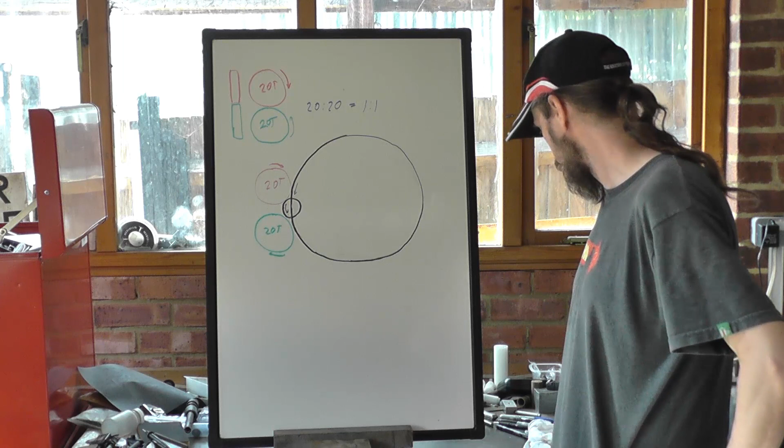At the top here I've drawn a couple of circles to represent gears, a driver gear and a driven gear, and I've drawn them at the side to show simple or simplex gearing, and I've got arrows showing the direction of rotation. Anybody's going to be able to see a 20 tooth gear driving a 20 tooth gear, ratio is 20 to 20, equivalent to 1 to 1.

Below it I've drawn again a driver gear and a driven gear, and I've drawn a couple of different idler gears of widely varying sizes. Now, one way of thinking about gearing is this is a 20 tooth gear. If it makes one revolution, it has moved by 20 teeth. So in the case of this small gear, let's just say it's a 10 tooth gear.

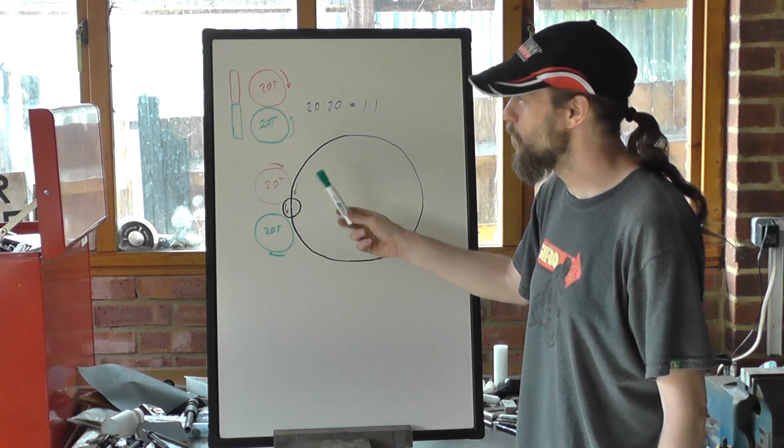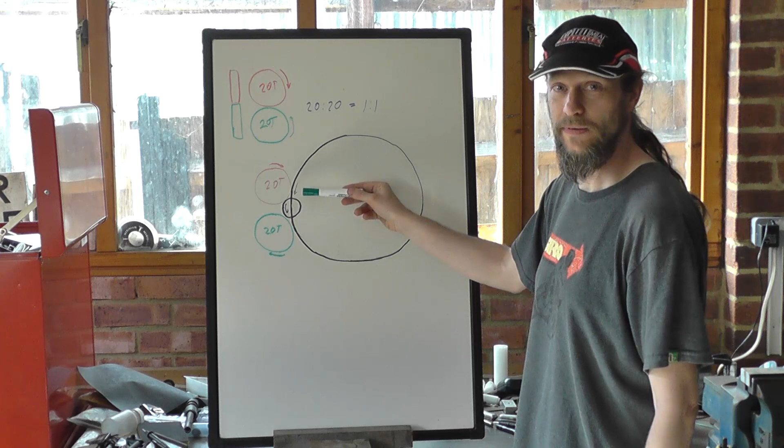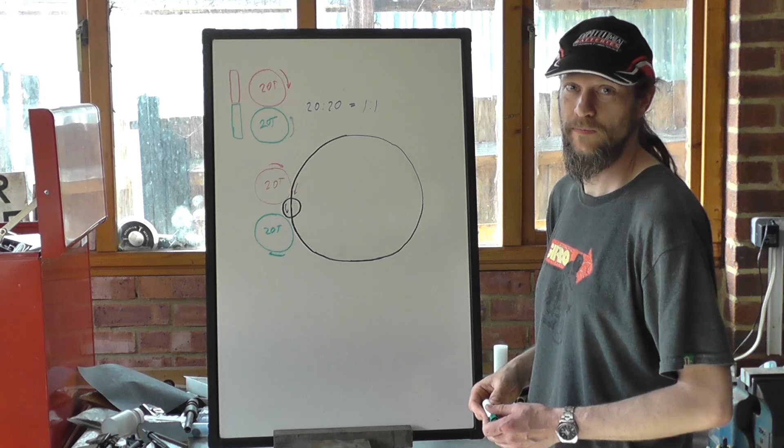If it's moved 20 teeth, it's moved 2 revolutions. When it drives the output gear, it's moved 20 teeth, so it moves this gear 20 teeth, that's moved 1 rotation. That moved 1 rotation, the gearing is still 1 to 1. This gear, it's moved by 20 teeth for 1 revolution of this gear, so this gear moves 20 teeth, 1 revolution, 1 to 1 gearing. The idler has no effect whatsoever on the ratio between these two gears. What it has done is changed the direction of rotation.

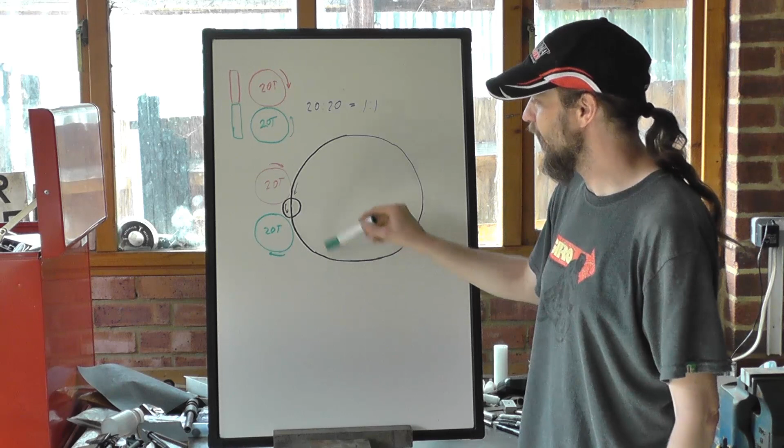Obviously, if there were another idler gear driving as well, we'd be back to this relationship of rotations. But again, the second idler gear wouldn't have affected the gearing. Okay, excuse my poor sketching skills.

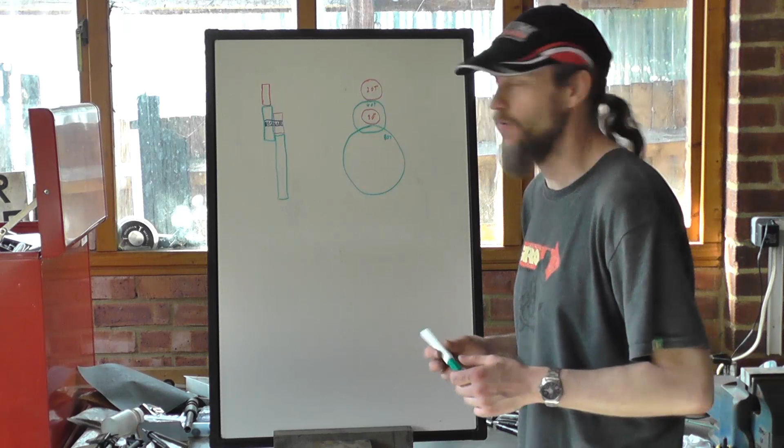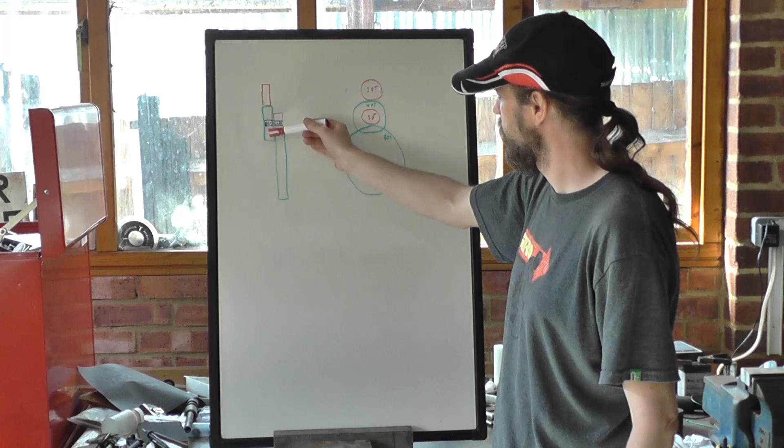But now we have compounded gearing. This is our initial driving gear, which is driving this gear. And that's on a common shaft with another driving gear driving another driven gear. So now we've got two ratios to deal with. So I've just written some fairly arbitrary numbers in there.

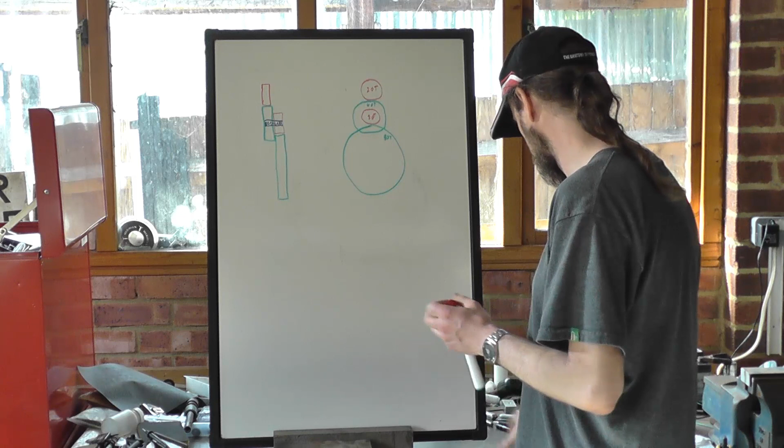So to start off with, we've got 20 to 40, and in terms of revolutions, that's 2 revolutions to 1.

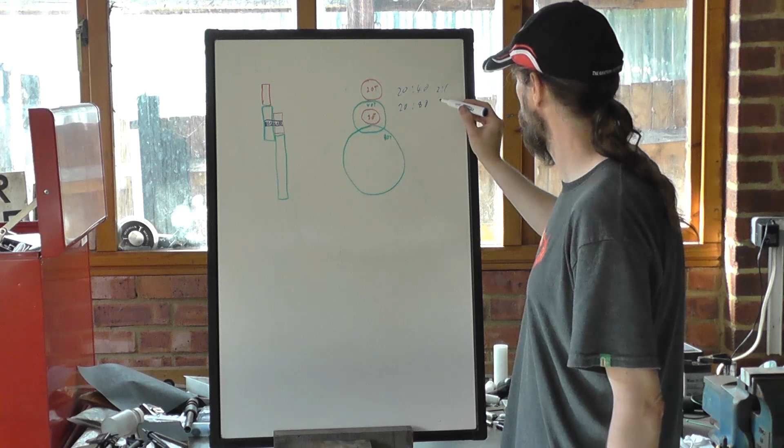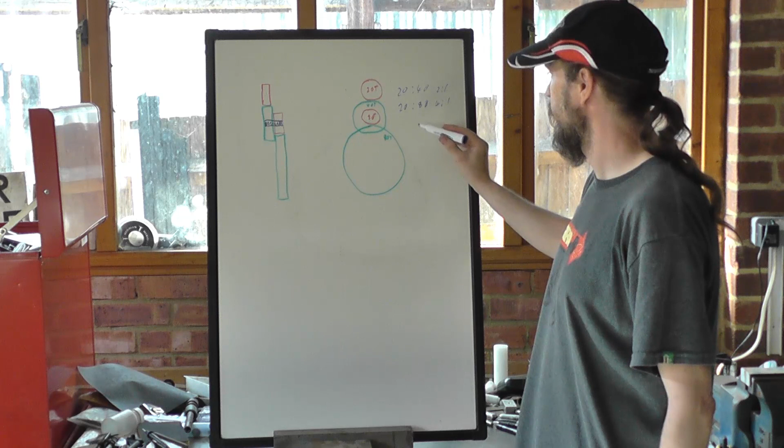And then we've got 20 to 80, again in terms of revolutions, is 4 to 1. And these multiply so that we end up with an overall ratio of 8 to 1 on the reduction. And this is where...

When we're thread cutting, we might have the 127 tooth gear, which gives us our perfect metric conversion, being half of 254, and there being 25.4 millimeters to an inch. In fact, that's how the inch is defined these days.

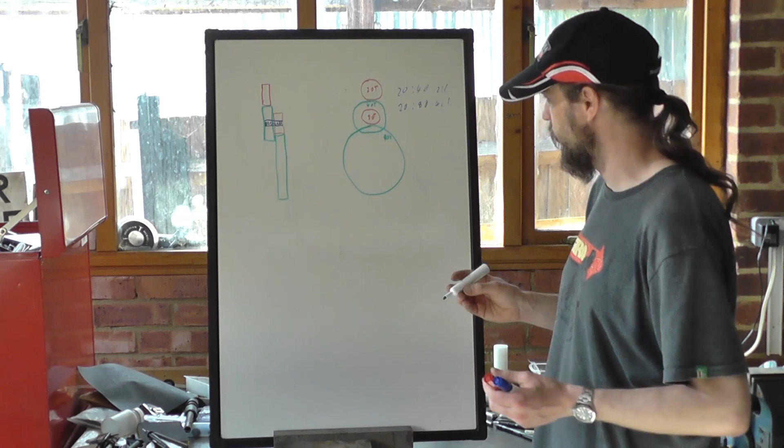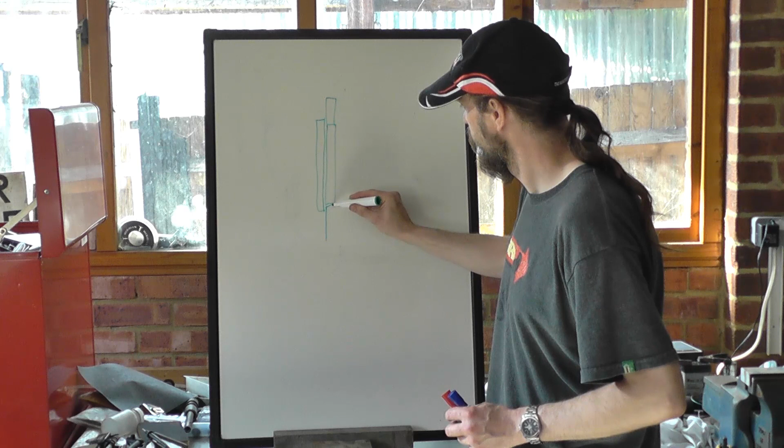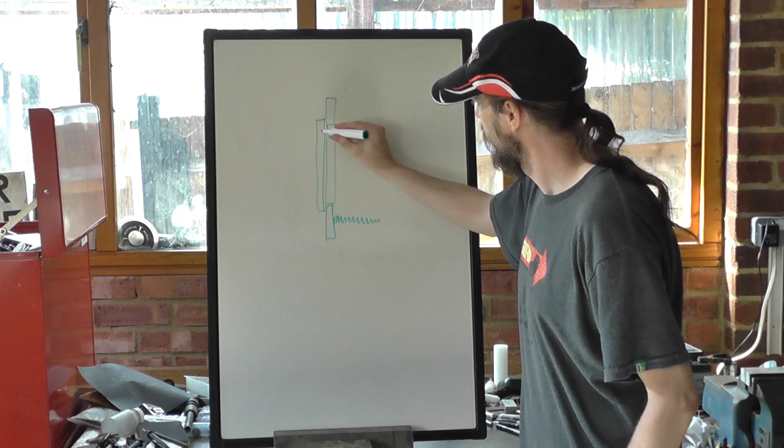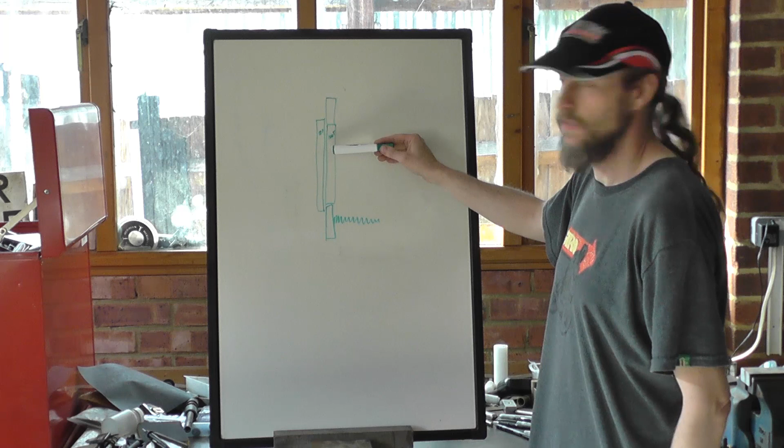Now I think what Steve's got on his machine is, from memory, a setup like this. You've got a gear on the spindle which drives a pair of gears on a common shaft, and then there is an output gear driving, well, it's driving into a screw cutting gearbox, but ultimately into the lead screw. So this would be a 100 tooth gear, and this would be 127. So when he's set up for imperial threads, this is just an idler gear. It has no effect on the gearing between these two, and I think these are both 40s.

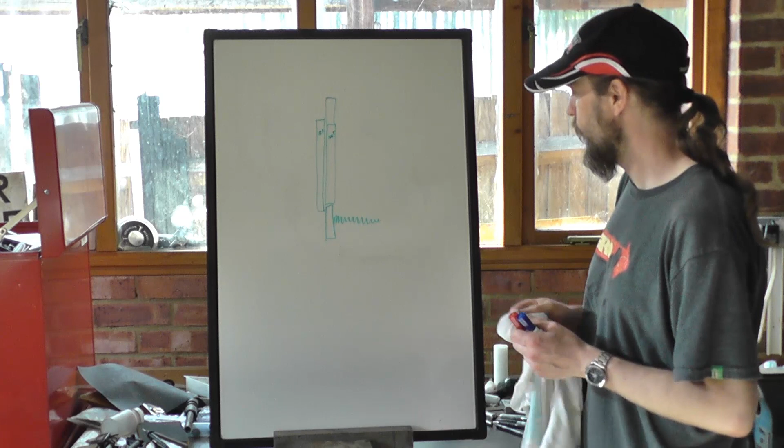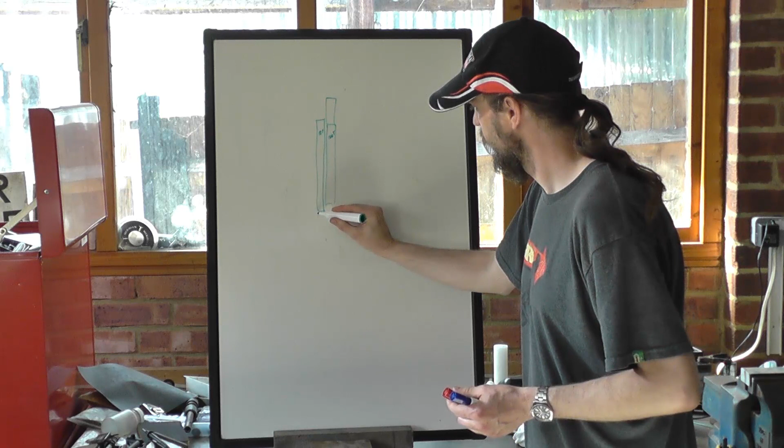Now what you do if you want to cut metric threads is you move the gear over and you put a spacer in here. So now we have compounded gearing.

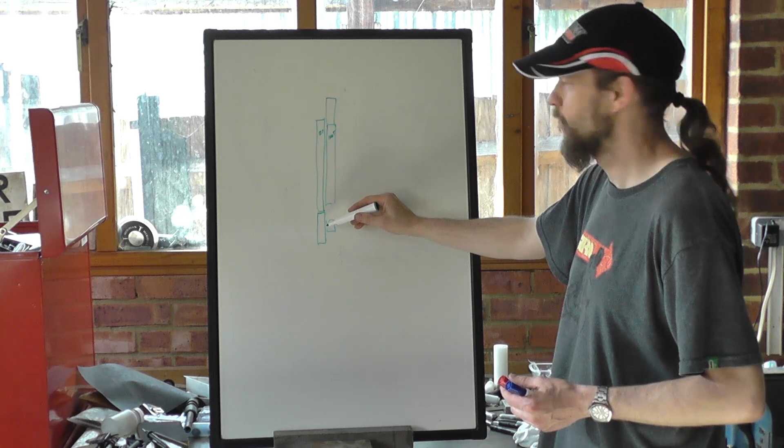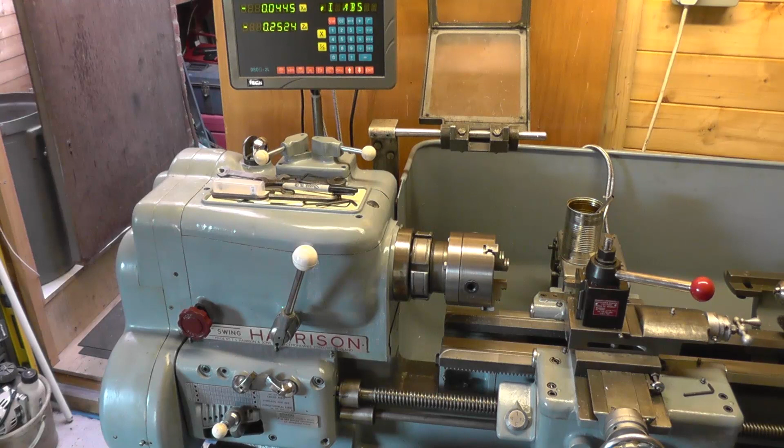So let's go and have a look at the behaviour of the threading dial on my lathe. Okay, I think I've just about managed to get everything in shot. I've got my threading dial, pulls forward to engage, and we are on the number 1 mark. I've got a line drawn on the screw and the gearbox just to give us a bit of a reference.

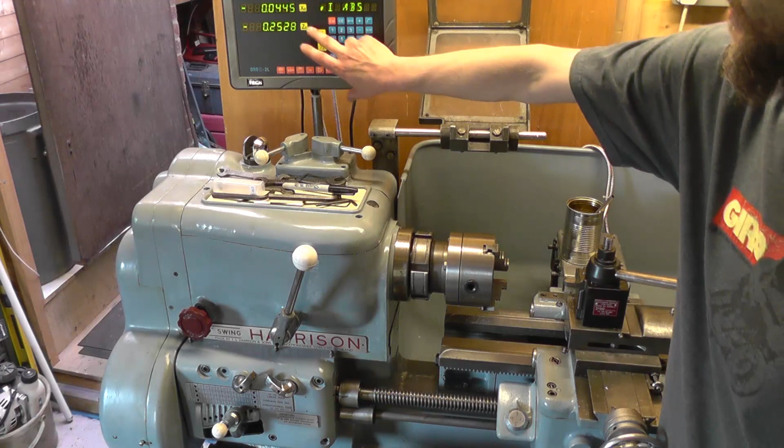And I'll zero the Z-axis on the DRO, and I'm rotating the lead screw down at the bearing support end. So if I rotate by one full turn of the lead screw, well, basically it's 250 thou, a quarter of an inch, which makes sense since I can measure the lead screw. So starting at the edge of one crest, one full turn, 2, 3, 4 full rotations, 1 inch. So it's a 4 TPI lead screw.

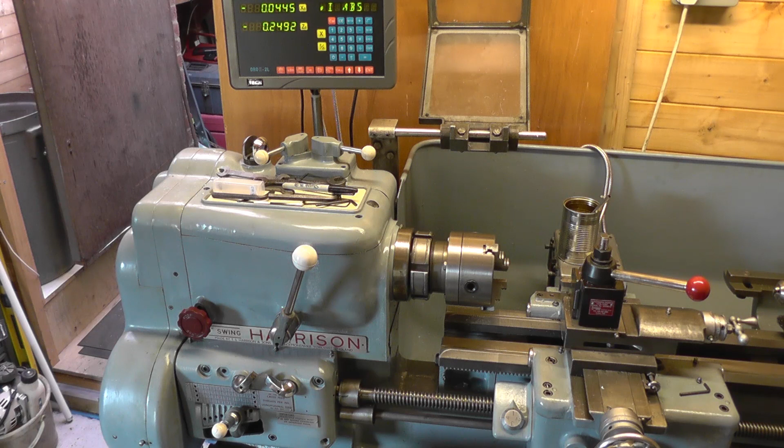So you could easily put a dial gauge on the bed and measure the movement, rotate the lead screw 1 full turn. Obviously if you do it a larger number of turns, the accuracy improves. So that's the first test. That's confirming our lead screw pitch.

Okay, having confirmed that our lead screw pitch really is what we think it is, let's see if we can frame this slightly better. Again, we've got our index marks on the lead screw. I've got my threading dial engaged on number 1. So if I now rotate the lead screw 1 turn, we're halfway between a pair of marks, come up to 2, and we're at a full mark, another 2, back to a number.

So if I go 4 turns, 4 turns, and at every point that we weren't being buzzed by a huge fly, when these marks lined up, we were either on a line or halfway between 2 lines. So the threading dial is agreeing with the lead screw.

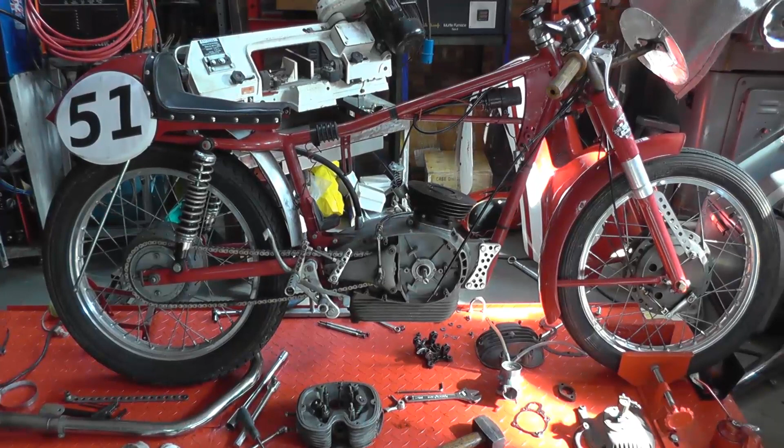I've done a post-meeting teardown on the Settebello, and despite the fact that it ran really pretty well, it's rather a mechanical disaster, and I'm afraid I am not at all impressed by the person who put this engine together.

The compression seemed to be pretty low, so I went to check the valve clearances and there weren't any. Now, that could easily be a case of this engine not having had much running time. I didn't check them before the meeting — they'd been checked on a previous outing. But I decided to take a proper look and see what was going on.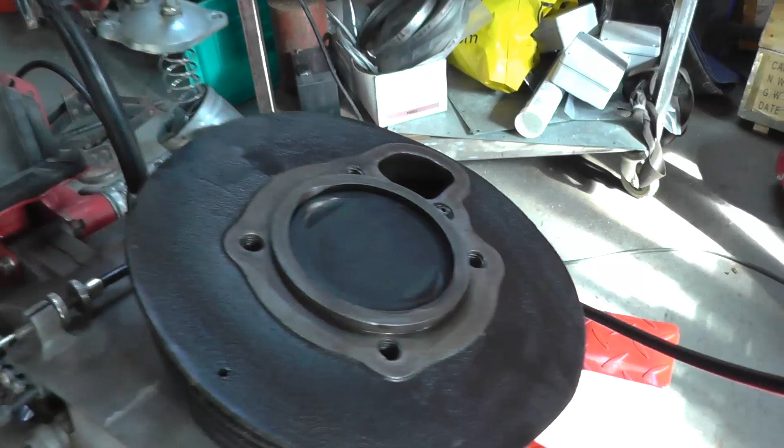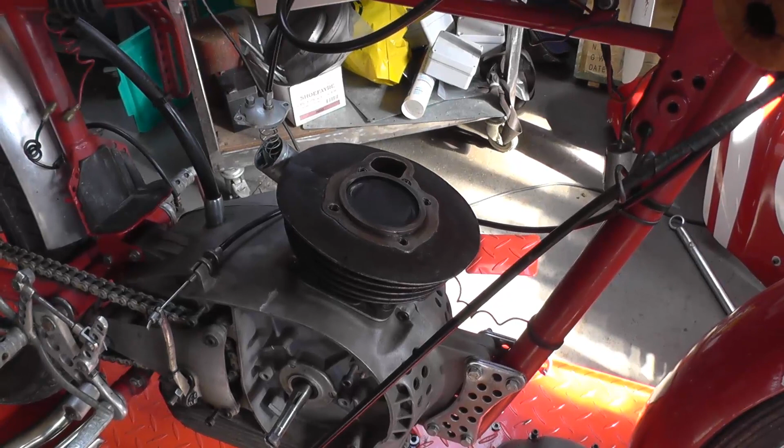When I got the cylinder head off, what was immediately obvious is that we've had valve to piston contact — not so bad on the exhaust, but pretty heavy on the inlet. Holding the cylinder head up to the light and looking down the exhaust port, which is reasonably short, I can see we've got a slightly bent valve. The inlet I'm not sure about.

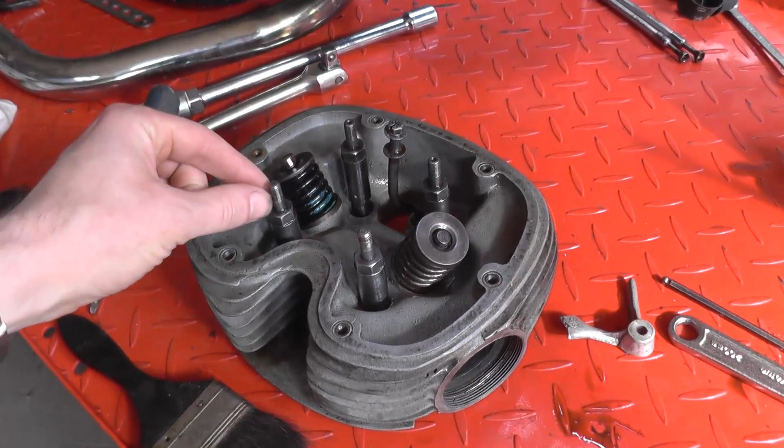Now I've got the cylinder head down here. These are some special head bolts that hold the head down onto the barrel, and then the valve gear, sitting over there, sits on top of these. I'm not sure if it's because there are copper washers at the bottom of these holes that vary in thickness, or whether the parts aren't made accurately, or the holes aren't the right depth, but there was a completely random assortment of shims under the rocker gear to get it sitting level — an arrangement I'm not that keen on. Getting a manual for these bikes is very difficult, because often nothing was really produced when they were new. You were kind of expected to look at stuff and understand how it works, and judge torque wrench settings from the size of the fasteners.

But I started noticing other things. The wire thickness on the two valve outer springs is different. The stems are different lengths, and obviously have the keeper in a different place. There's a lash cap on this one. The inner springs — one of them is wound opposite, for an interference fit. On this one, they're both the same hand helix. So I've got a lot of investigation and thinking and reworking to do.

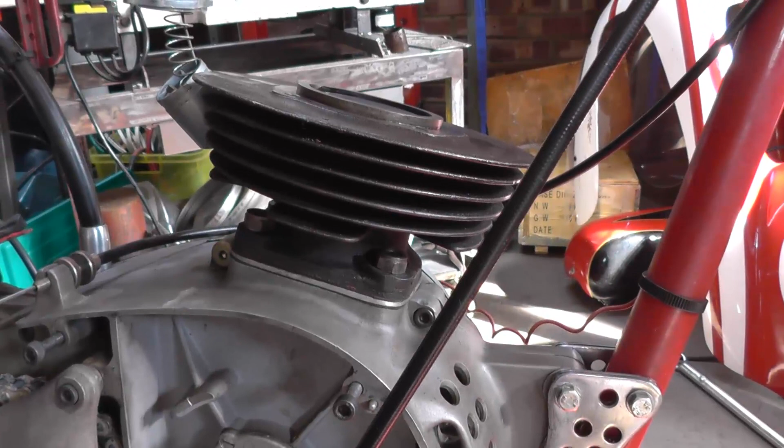You can see that there's a plate under the barrel. The barrel has in fact been shortened by one fin, and the spigot machined on top, with a recess in the bottom of the barrel — whereas the original setup, here's an unmodified barrel, would have been flat on the top. This engine has been taken out from 61 to 64 millimeters to get it close to 200.

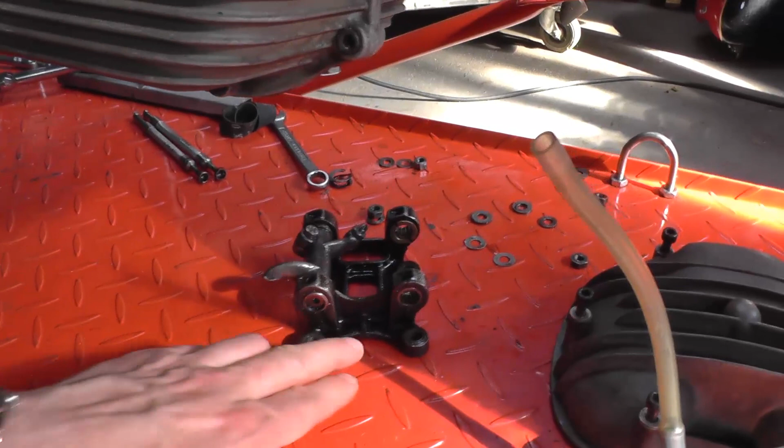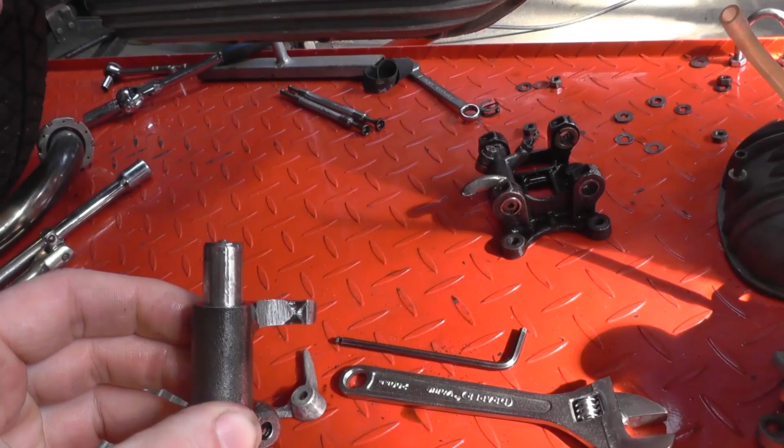Now there's some things that are reasonably well done, like the needle roller conversion on the valve gear carrier, but the shafts themselves don't look particularly hot, and I am singularly unimpressed with the crude grinding, with no attempt to blend out any stress raisers. I don't know how close we can get in here and focus, but look at the tip of that rocker and the shape of it — and likewise the other, which is an even worse finish.

Supposedly this engine was put together by a professional. Well, he may have been paid for his work, but I don't consider the actual attention to detail, and the fit and finish, to be at all professional.

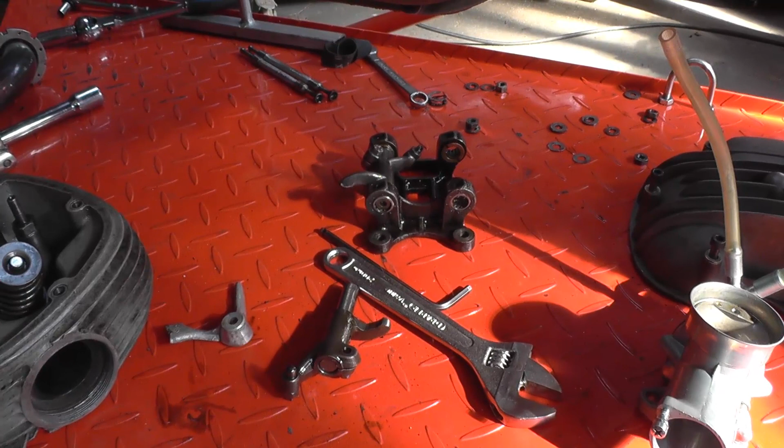So we'll have to see what we can do. Some of these parts — getting replacement rockers is going to be a case of finding an Italian speaker to do a bit of hunting around in Italy for me. Though possibly some of this may be available from America, seeing as Herdan are still around and have some old stock. Anyway, a few bits and pieces to do. Hopefully it'll get sorted out and we can have it back on track on July the 4th, for the Morini Riders Club track day. Because, you know, it went reasonably well, and with all that's wrong with it, it has the potential to be an awful lot faster, which could make it quite a competitive machine.